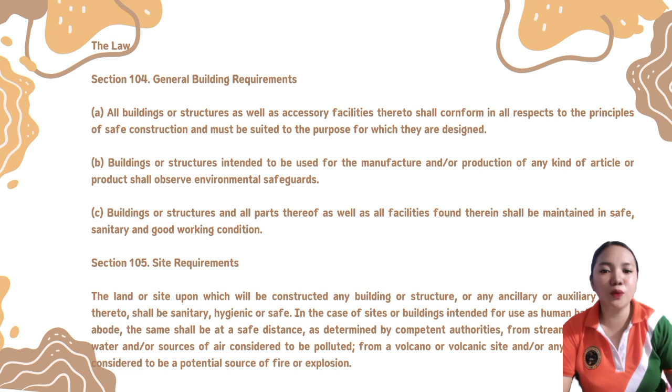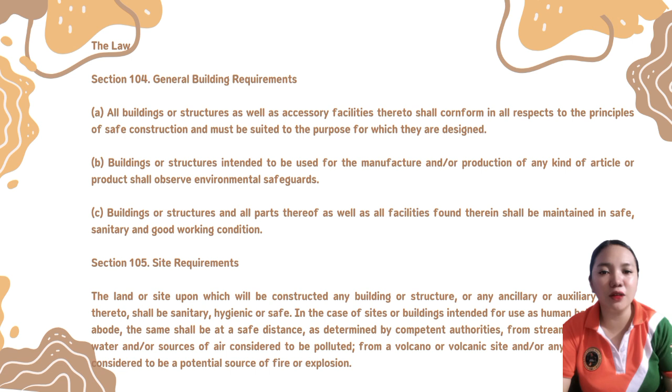Section 105, Site Requirements: the land or site upon which will be constructed any building or structure or any auxiliary facility thereto shall be sanitary, hygienic, and safe. In the case of sites or buildings intended for use as human habitation or abode, the same shall be at a safe distance, as determined by competent authorities, from streams or bodies of water and sources of air considered to be polluted, from a volcano or volcanic site, and/or any other building considered to be a potential source of fire or explosion. We have here the building permits.

So by the law on Section 301, building permits, no person, firm or corporation, including any agency or instrumentality of the government, shall erect, construct, alter, repair, move, convert or demolish any building or structure or cause the same to be done without first obtaining a building permit therefor from the building official assigned in the place where the subject building is located or the building work is to be done.

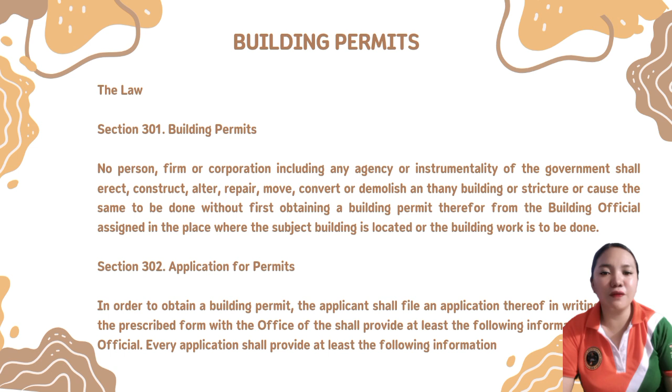So from Section 302, application for permits, in order to obtain a building permit, the applicant shall file an application therefor in writing and on the prescribed form with the Office of the Building Official. Every application shall provide at least the following information. So we have here the description of work to be covered by the permit applied for. We have the description and ownership of the lot on which the proposed work is to be done, as evidenced by the TCT and/or copy of the contract of lease over the lot if the applicant is not the registered owner.

So the use or occupancy for which the proposed work is intended, and the estimated cost of the proposed work. To be submitted together with such application are at least 5 sets of corresponding plans and specifications prepared, signed, and sealed by a duly licensed architect or civil engineer in case of architectural and structural plans, by a registered mechanical engineer in case of mechanical plans, by a registered electrical engineer in case of electrical plans, and by a licensed sanitary engineer or master plumber in case of plumbing or sanitary installation plans.

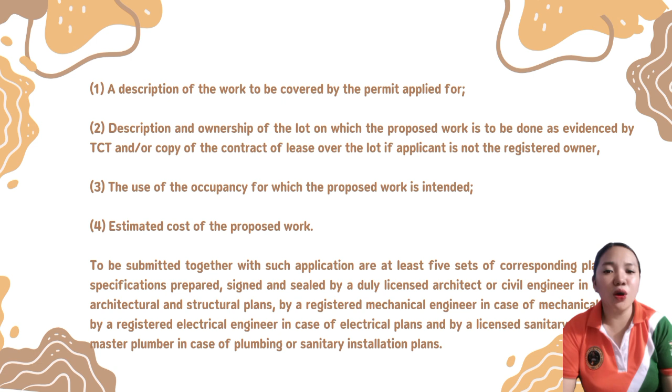So we have here the general requirements of all buildings by use or occupancy. So for the law, in Section 704, location on property, we have the general: no building shall be constructed unless it adjoins or has direct access to a public space, yard, or street on at least one of its sides. We have here the fire resistance of walls. Exterior walls shall have fire resistance and opening protection. So these sections of the building code address the placement and safety of buildings.

Section 704 requires that all buildings must be connected to a public space, yard, or street on at least one side. This ensures accessibility for emergency vehicles and public access. So Section 704 also focuses on fire safety. It mandates that exterior walls must be fire resistant and have protection for openings like windows and doors. So this helps prevent the spread of fire and improves the safety of the building and surrounding area.

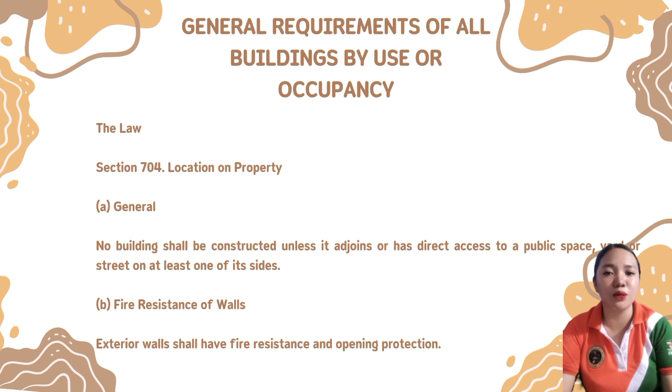So we have here the light and ventilation. So the law in Article 801, general requirements of light and ventilation: subject to the provisions of the Civil Code of the Philippines on easement of light and view, and the provisions of this part of the code, every building shall be designed, constructed, and equipped to provide adequate light and ventilation. So we also have: all buildings shall face a street or public alley or private street which has been duly approved.

In Article 806, size and dimensions of rooms. So we have the minimum sizes of rooms and their least horizontal dimensions shall be as follows. First, rooms for human habitation, 6 square meters, with least dimension of 2 meters. Kitchen, 3 square meters with least dimension of 1.5 meters. Bath and toilet is 1.2 square meters with least dimension of 0.9 meter.

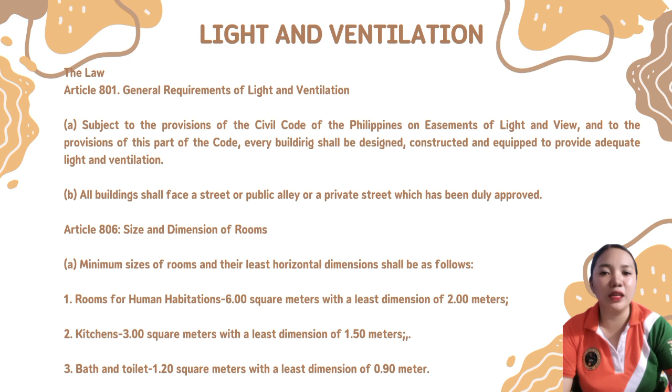So we have the light and ventilation in Article 807, the air space requirements in determining the size of rooms. So the minimum air space shall be provided as follows. School rooms, 3 cubic meters and 1 square meter of floor area per person. For workshops, factories, and offices, we have 12 cubic meters of air space per person. Habitable rooms, 14 cubic meters of air space per person.

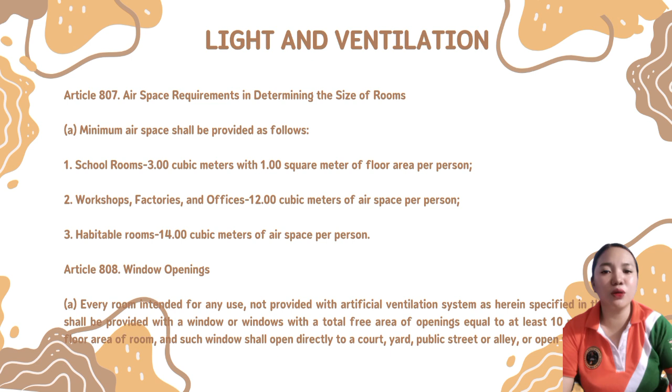In Article 808, window openings, every room intended for any use not provided with artificial ventilation systems as herein specified in this code shall be provided with a window or windows with a total free area of openings equal to at least 10% of the floor area of the room, and such window shall open directly to a court, yard, public street or alley, or open water courses.

So for light and ventilation in Article 811, artificial ventilation, we have here that whenever artificial ventilation is required, the equipment shall be designed and constructed to meet the following minimum requirements in air changes. For rooms above grade used as bakeries, hotel or restaurant kitchens, laundries other than accessory to dwellings, and boiler rooms, not less than 10 changes of air per hour shall be provided.

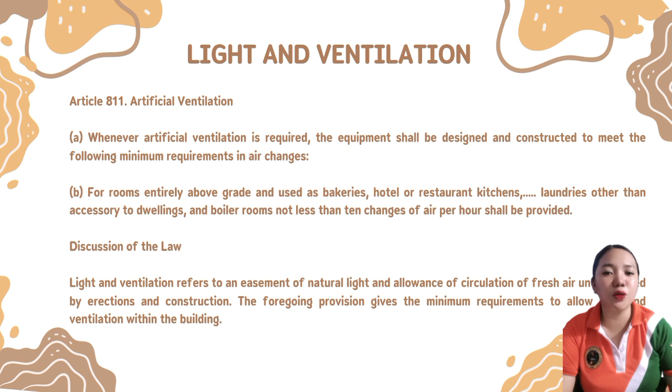So for the discussion of the law, light and ventilation refers to an easement of natural light and allowance of circulation of fresh air unobstructed by erections and constructions. The foregoing provisions give the minimum requirements to allow light and ventilation within the building.

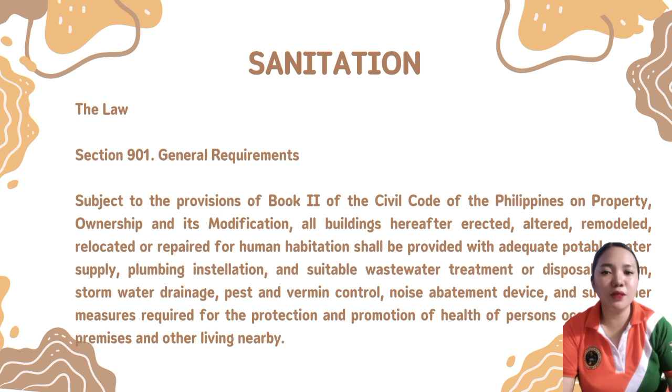So we have the sanitation. So the law in Section 901, general requirements: subject to the provisions of Book 2 of the Civil Code of the Philippines on property, ownership and its modifications, all buildings hereafter erected, altered, remodeled, relocated, or repaired for human habitation shall be provided with adequate potable water supply, plumbing installations, suitable wastewater treatment or disposal system, stormwater drainage, pest and vermin control, noise abatement devices, and such other measures required for the protection and promotion of health of persons occupying the premises and others. So the general design and construction requirements.

So the law, Section 1201, general requirements: buildings proposed for construction shall comply with all the regulations and specifications herein set forth governing quality, characteristics and properties of materials, methods of design and construction, type of occupancy and classification.

All matters relative to the structural design for all buildings and other structures not provided for in this chapter shall conform with the provisions of the National Structural Code of the Philippines as adopted and promulgated by the Board of Civil Engineering pursuant to Republic Act Number 544 as amended, otherwise known as the Civil Engineering Law.

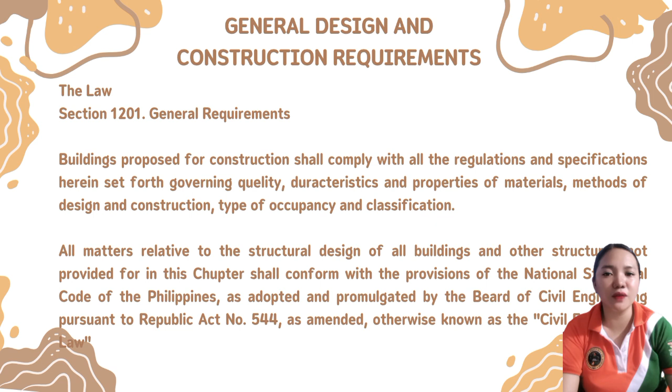So we also have the registration of guests and occupants. The Civil Code of the Philippines gives provisions for necessary deposits made by travelers in hotels or inns. This implies the need for the registration of guests and occupants in accommodation establishments.

Accordingly, keepers of hotels or inns shall be responsible for the deposit given by the travelers or guests, provided notice was given with respect to the effects brought by these guests and that the keepers of hotels and inns have taken the necessary precautions prescribed regarding their safekeeping. The liability of the hotel keepers extends not only to the effects lost or damaged in the hotel rooms, but also those lost in annexes such as the garage.

And in this kind of deposit damage in hotels, the hotel keeper cannot escape liability by posting notices to the effect that he is not liable for the articles brought by the guest. Any stipulations limiting the liability of the hotel keeper shall be void.